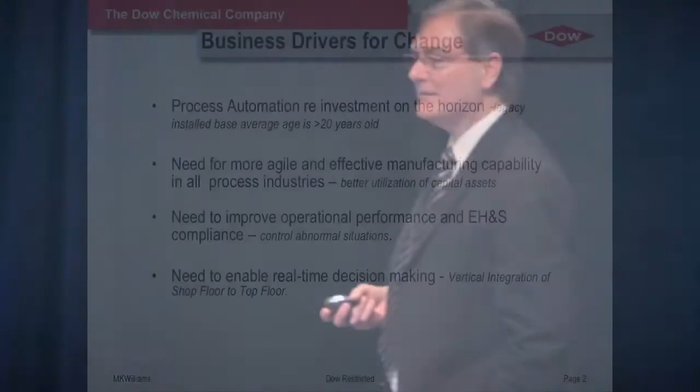Let's step back a bit in time, bridging from Eric's timeline of the 1970s through 2010, four decades of evolution of control systems. Fundamentally, there have been a number of different ways to program computers over the last 40 years, and some emerging technology, specifically object-oriented technology, in the last 10 years.

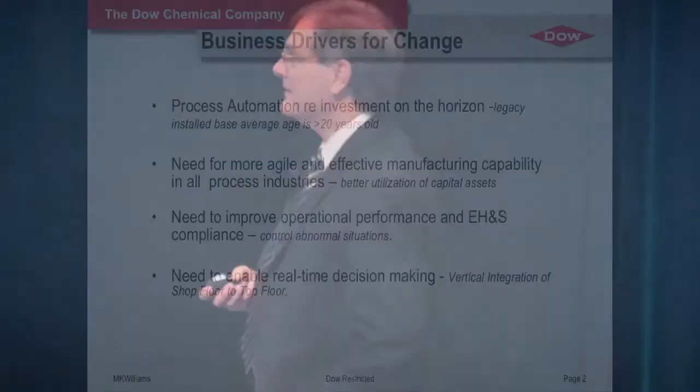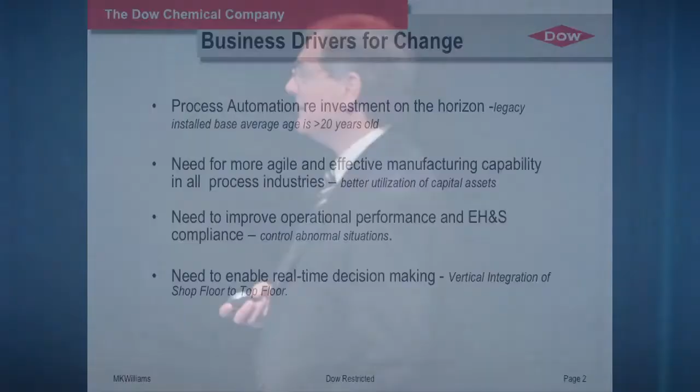Given the change in programming environments, we are faced in our industries right now with a large installed base exceeding 20 years of age. A lot of us are faced with a significant investment we have to justify moving forward. We need to fundamentally understand how to do this cost-effectively, preserving past capabilities while moving forward with future capabilities available in modern control systems.

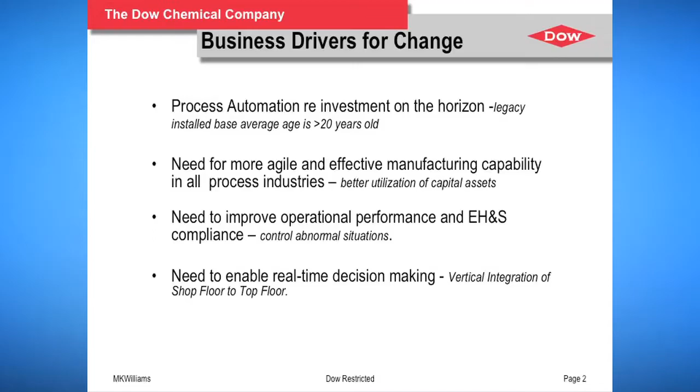As we move forward, we want to achieve improved OEE metrics and asset capability, and importantly, as mentioned today in the opening presentation about cloud computing, we need to open up the control systems with that vast amount of real-time information to the upper layers for more real-time data management and decision-making. To do that, we need to take advantage of these new technologies.

So what have been the barriers over the last 10 years to adopting techniques like class-based or object-oriented programming? For most of us, Dow Chemical included, it's a very high cost of conversion. Coming from a legacy environment to a completely different technology, the learning curve and cost can be excessive. On top of that, we have a skills base of engineers taught in old techniques. The actual effort and availability of people to program this environment is problematic, to say the least.

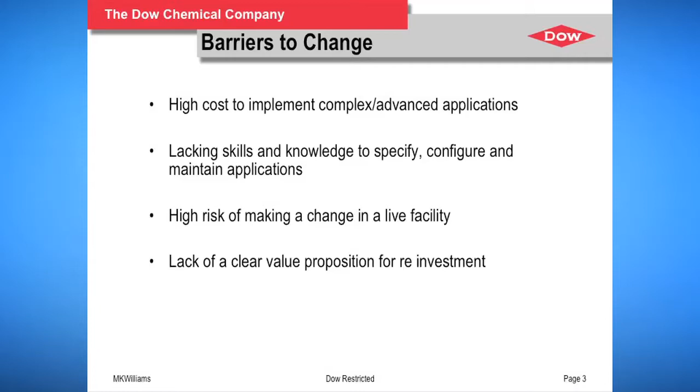As Eric mentioned, we also have high risk of change, especially in live facilities. And the design intent, when moving from an existing facility to a new platform, can be at risk while going through this change. So what is the clear value proposition for making this leap of faith or technological change as we go forward?

This is an old slide, modified to invert the curve. It's a parabola going upward with the optimization at the bottom. Fundamentally, envision where we were. On the left-hand side is the degree of innovation, the freedom of application engineers to create sophisticated control strategies to improve the operational excellence of our facilities.

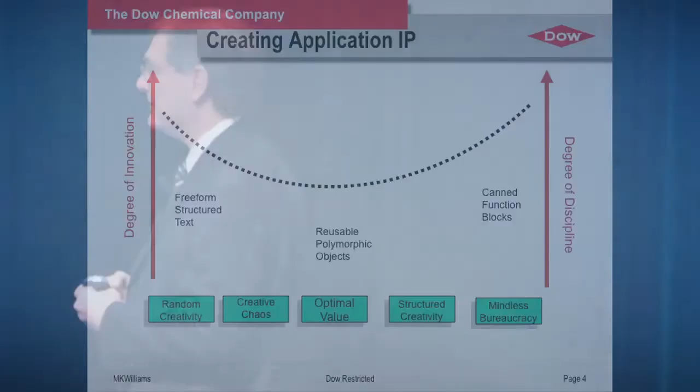On the right-hand side is discipline—being consistent time after time, providing applications with low cost of ownership from a maintenance perspective. In the 1131 programming environment, you have a high degree of innovation in the free-form structured text environment. Many of our legacy systems were programmed in that environment.

In the mid-80s to late 90s, a number of control companies came out with canned functionality, function blocks, templates, and so on, that were readily accessible. So you have this dichotomy: on the left-hand side is what I call creative chaos, where engineers want to do the best they possibly can for you, but in that environment the cost starts to skyrocket.

On the right-hand side you have what I call mindless bureaucracy—just do what I tell you to do, here's the spec, just go do it. In that environment, you stifle creativity and possibly the value of the application you're creating, but you have lower cost because it's out-of-the-box functionality from the vendors.

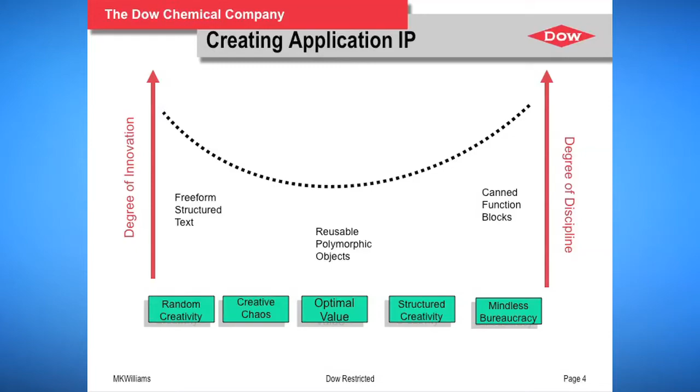I would propose to you that there is an optimum, not a minimum, an optimum, using class-based, object-oriented type techniques which are readily available in the IT world but not so well used in our particular world—to use that technique to arrive at an optimum value, which I call structured creativity, a hybrid between creative chaos and mindless bureaucracy. That optimal value comes in the form of reusable content—I emphasize this word, reusable—that can be used in one or multiple projects.

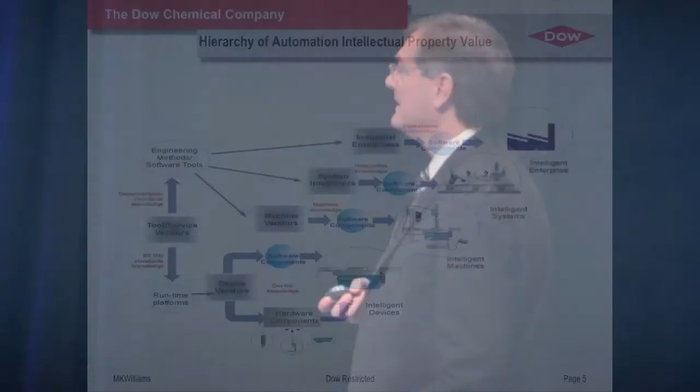I borrowed this slide from one of our standards organizations, primarily focused on the discrete industries. Some people may recognize it, but it applies across all industries, whether continuous, batch, hybrid, or discrete businesses. I propose that this reinvestment we're facing should strongly consider, in the state-of-the-art automation world, object-oriented programming as a vehicle for creating new content.

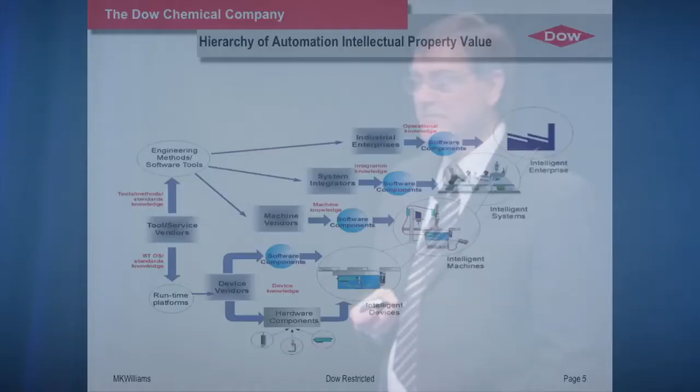New capability in the form of intellectual property has tangible value, tangible asset value. Typically that's not viewed that way by our financial advisors, but I would contend that the intellectual property created in this hierarchical structure has every bit as much value as the tangible asset—the pump, the valve, the tank—that's in the field.

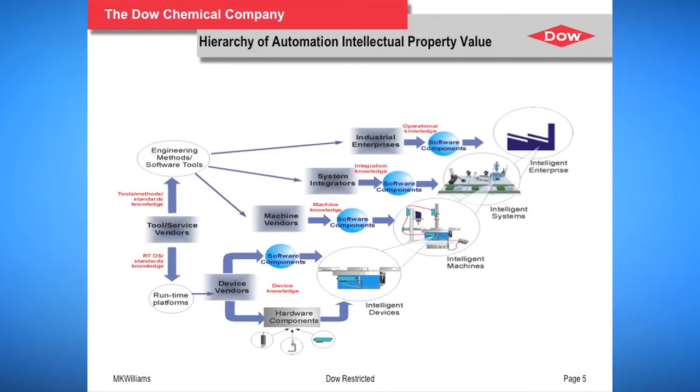And if evaluated properly in an economic evaluation, you can make the case that investing up front in a reusable object-oriented design can actually produce a cost savings case and a value contribution case, based on content or containers as you go up the level of sophistication from basic device control to the total physical plant.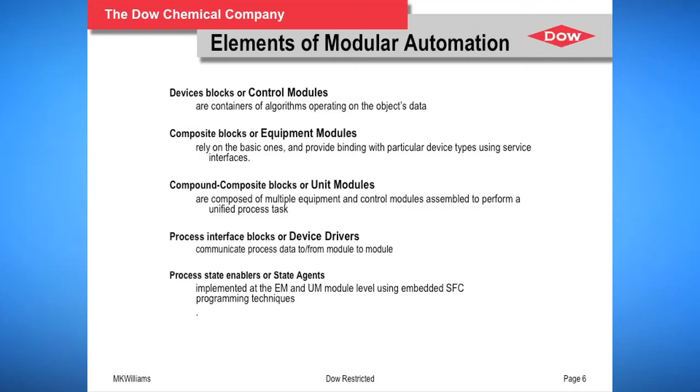So as you saw in that model, the intellectual property can be containerized from device control up through a group of equipment modules, through units, unit operations, and ultimately through entire process cells in an entire plant. As you add more knowledge within that application, you are gaining more and more intellectual property value. And what is that capability that is containerized?

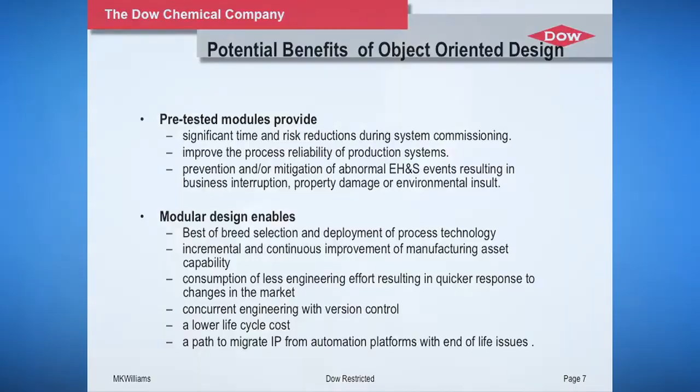By taking an object-oriented or class-based approach, you can achieve significant time and risk reduction in the actual commissioning of operations and improve reliability right out of the blocks. Because as you create modules and build them up, they are tested, and that testing and capability is inherited by the higher level of object content as you build the control strategy.